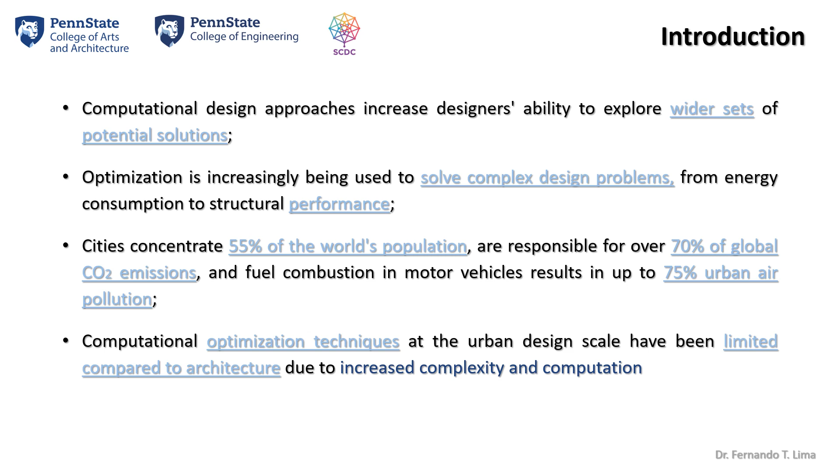In this sense, we hypothesize that computational optimization can be useful in urban design when associated with generative design systems and evaluation metrics. The overall objectives are to evaluate the benefit of employing optimization tools to improve urban performance, to compare the effectiveness of various optimization algorithms for tackling problems that are recurrent in urban design, and to explore and assess different generative approaches towards the formulation of orthogonal and non-orthogonal grids from the perspective of transit accessibility.

Thus, our research framework consists of combining algorithms for blocks and streets generation, using Physical Proximity Calculator for evaluating the generated fabric's performance, and also using various Grasshopper optimization plugins for guiding generation towards solutions with optimized performance. Thus, in summary, we implemented a generative approach for optimizing urban fabric configuration through evaluation metrics set as fitness functions in optimization processes.

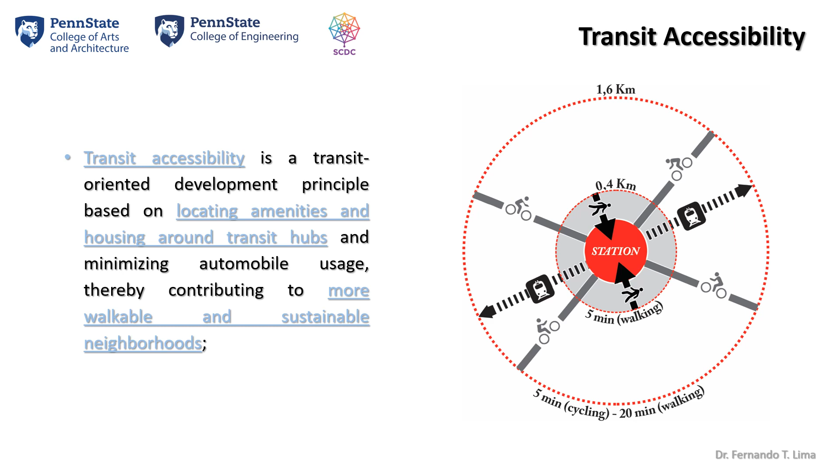Transit accessibility is a transit-oriented development principle based on locating amenities and housing around transit hubs and minimizing automobile usage, thereby contributing to more walkable and sustainable neighborhoods. Transit accessibility can be evaluated in early design by calculating physical proximity index. PPI is an index extracted from Physical Proximity Calculator, a city metrics tool developed by Lima that expresses on a 0 to 1 scale the smaller distance between a target and other locations in a neighborhood. The following figure illustrates the way that PPI works.

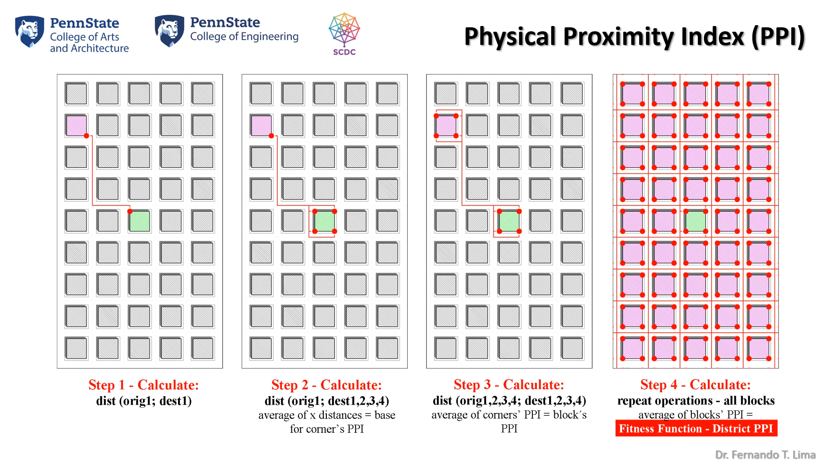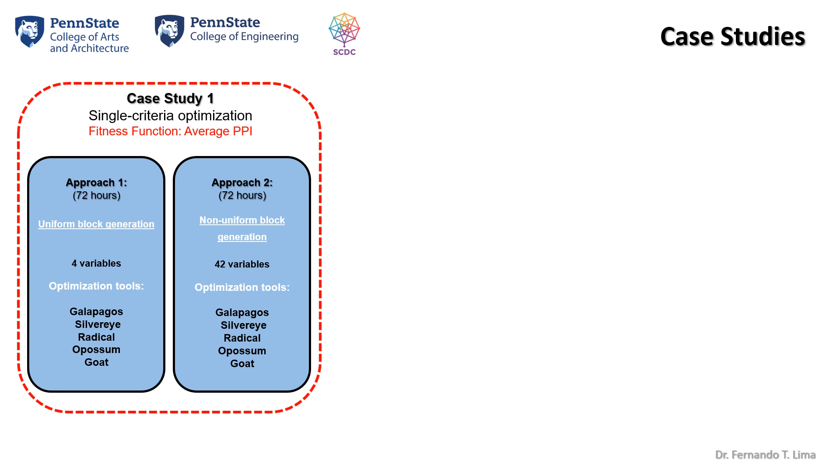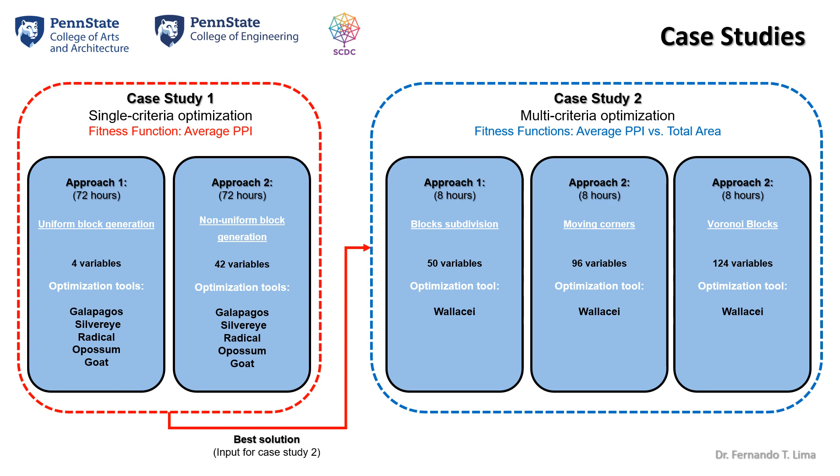In order to explore optimization possibilities in urban fabric generation, we implemented two case studies of varying complexity. For each case study, we tested several different optimization tools for a total of 168 hours of CPU processing. The first case consisted of generating uniform and non-uniform blocks using single criteria optimization for finding urban fabric arrangements with higher physical proximity indexes. The second case, in turn, consisted of addressing different approaches for modifying the best solution found in case 1, using multi-criteria optimization to deal with the transit accessibility and infrastructure costs at the same time.

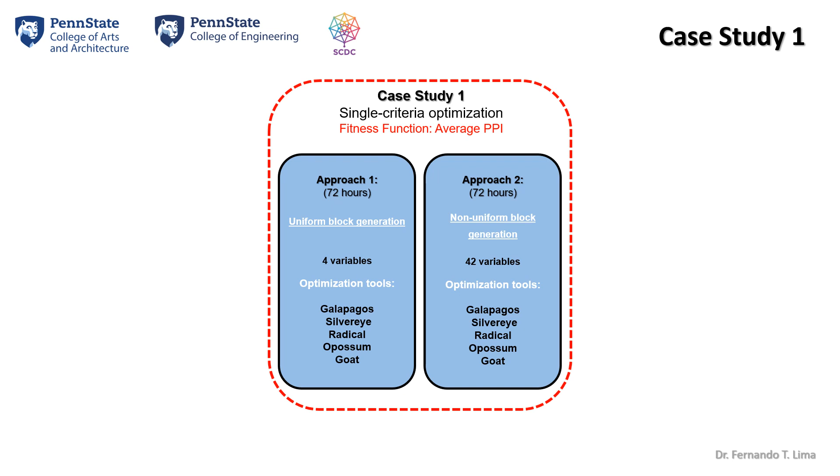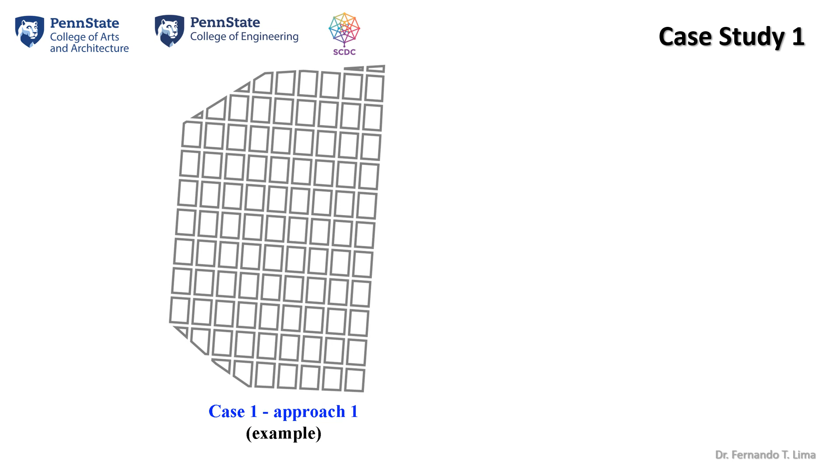Case study 1 consisted of two basic parametric approaches, uniform and non-uniform block generation. In the first approach, a generative algorithm was implemented to create a rectangular grid of blocks and streets for a given area. In this experiment, all blocks had equal dimensions and four variables were optimized: block's length, block's width, street's width, and grid rotation angle. The second approach, in turn, followed the same basic structure with one crucial difference. Blocks could have different dimensions while keeping grid alignments. In both approaches, the optimization tools mentioned before were set to find fabric layouts that provided the higher physical proximity index between the neighborhood central block and all others. The goal was to identify which approach would provide better solutions and which optimization algorithm would perform better, considering solution quality and computation time.

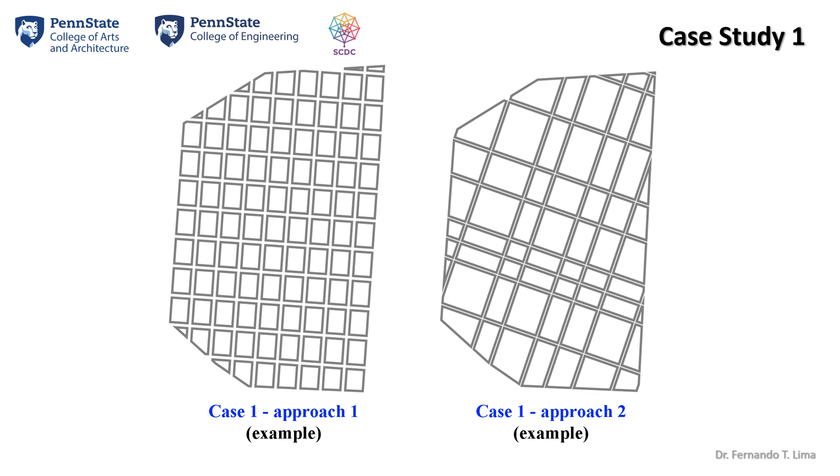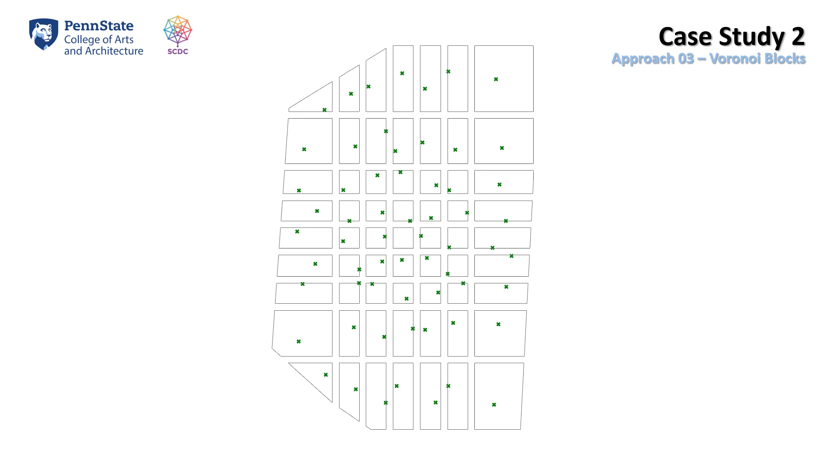In case study 2, optimizations were performed according to the same logic as in case study 1, but with freedom beyond that of a rectilinear uniform grid. In this sense, the second case study consisted of further refining the best solution found in case 1 through three different deforming approaches for subsequent optimization. Block subdivision approach consisted of subdividing the blocks by creating new in-between street and block configurations, aiming to verify the outcomes of softening the original grid alignment. The moving corners approach, in turn, consisted of evaluating the effects of moving the block's corners while keeping the street's width, generating non-orthogonal grids. The Voronoi blocks approach consisted of extracting the original block centroids to generate a Voronoi diagram with them. Thus, the idea was to explore moving these central points and evaluating different Voronoi-shaped fabrics, defined according to the movement of original block centroids.

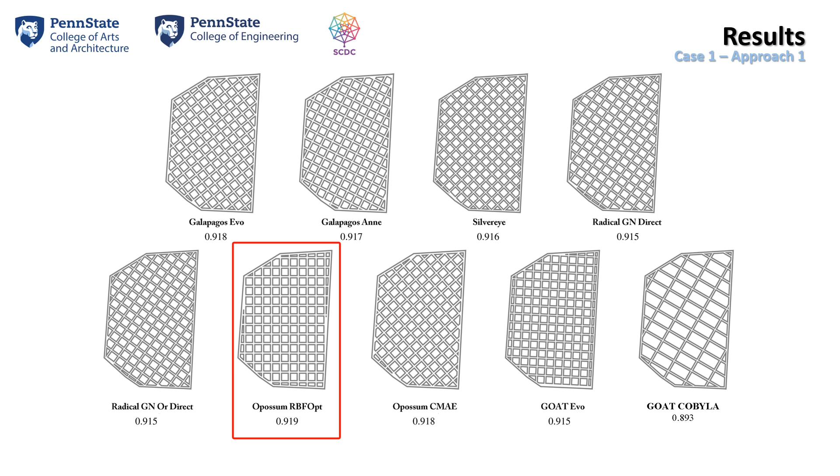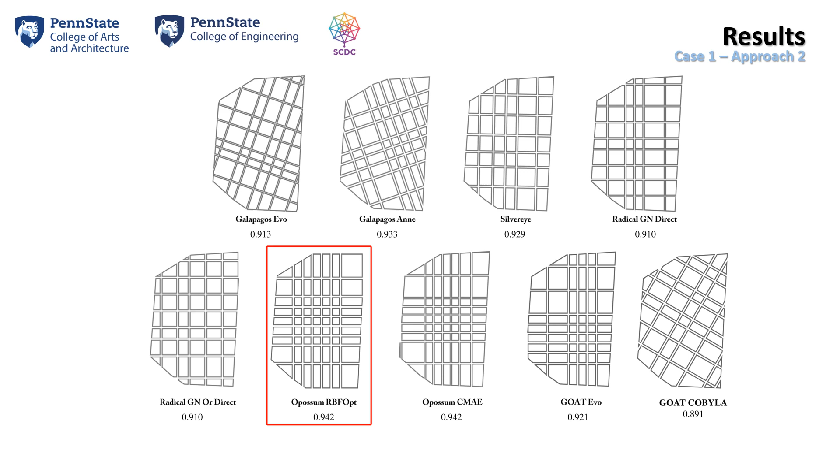Here we can find the case 1 approach 1 results, and here we can find case 1 approach 2 results. Note that Opossum provided the best solutions in both approaches. In sequence, we can find the best solutions through time graphs for both case 1 approaches.

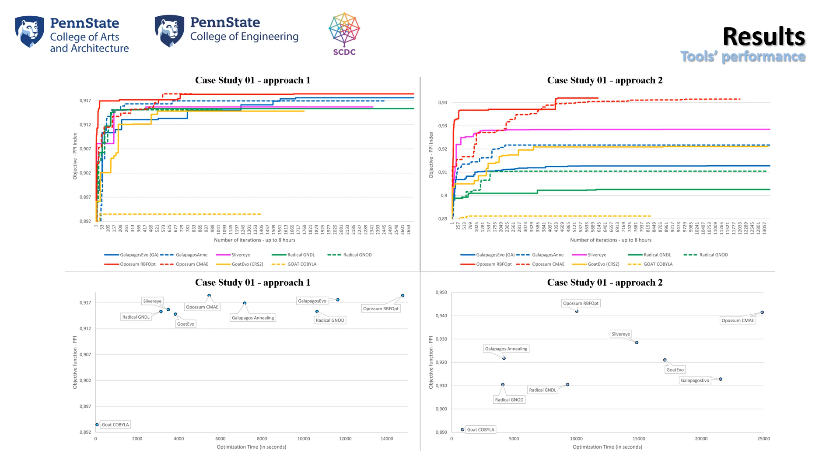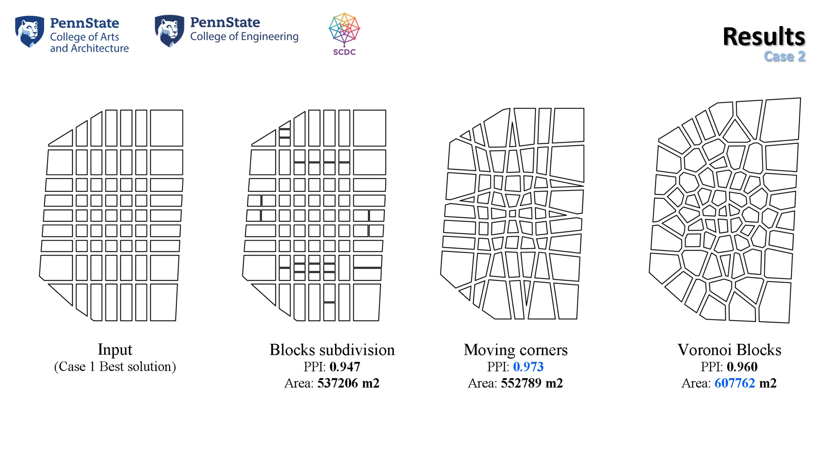Case 2, in turn, provided us with the following findings. All three case 2 approaches provided better solutions than the original input in terms of PPI. As such, the optimization helped to identify that more flexible and complex grids, in terms of shape and dimensions, tend to deliver greater transit accessibility than rectangular and uniform-oriented grids. In addition, the adoption of different block patterns can lead to solutions more directed at transit accessibility or infrastructure cost, confirming the trade-off. Overall, the use of different generative approaches allowed for exploring a wide range of solutions, while multi-criteria optimization helped in identifying designs that balance transit accessibility and infrastructure cost. The Voronoi approach solutions tend to yield fabrics with less street area, and moving corner solutions returned highest physical proximity indexes.

Optimization provided meaningfully better solutions than input design in both case studies, allowing us to explore a wide range of solutions according to performance metrics. Results suggest that RBF algorithm might perform better in problems structured in this way, while COBYLA might perform worse. We recognize these experiments have some limitations due to urban design's complexity, multiple viewpoints, and stakeholders, since this research simplifies urban design aspects. In future works, we intend to add more complexity to the model by considering other parameters, like the location of public amenities and housing, and by adding grammar rules for topological variation, which would significantly increase the universe of possible solutions.